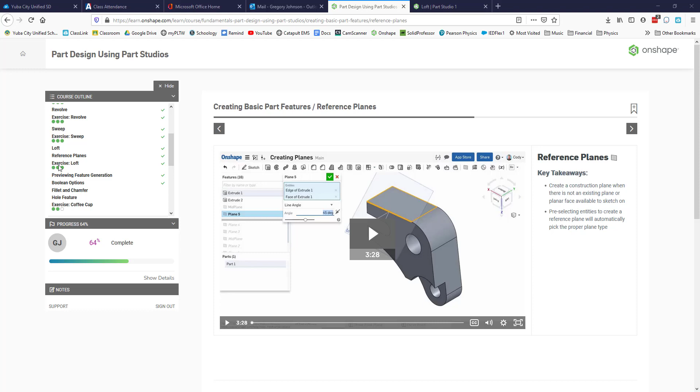All right, we are going to do the loft exercise now, and it is part of the Part Design Using Part Studios lesson, or course as they call it. It's very important that you watch the two videos that lead up to it, the loft and reference plane, so you know what's going on when they ask you to do those. Let's go ahead and get started.

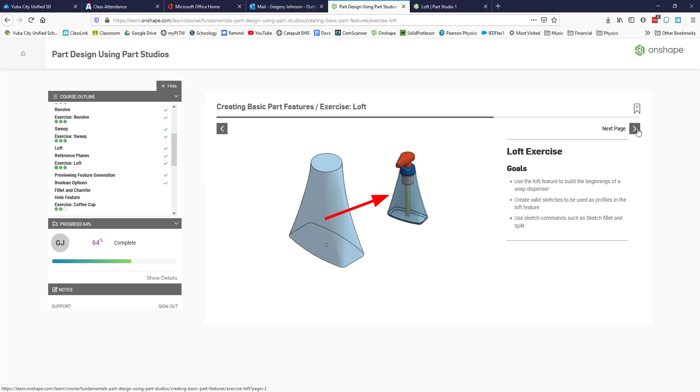I'm going to click over here on next page. It says create a new document. Be sure that the workspace length unit is set to millimeters. Begin a sketch on the top plane. This will be the bottom profile sketch.

I'm going to go over here, and I actually did already start a document called Loft. I got cut off, my internet cut off while I was making the video the first time, so whatever.

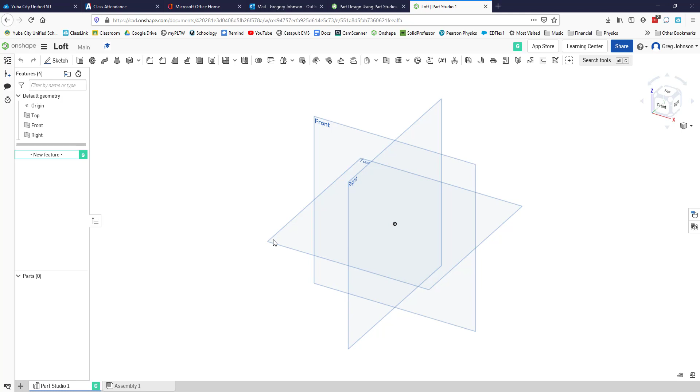So we're going to start a new sketch on the top plane by hovering over the top plane, right-clicking, selecting New Sketch. Now I'm going to go ahead and hide the planes by right-clicking on one of the planes and clicking on Hide All Planes. I'm going to hit the N key so I can have a normal view. And let's start our sketch.

Let's see what they want us to do here. Okay, it says sketch a rectangle whose center is coincident to the origin. Sketch two arcs as shown.

So I'm going to go over here now. One of the things that I'd noticed that people didn't realize from a couple of the earlier lessons is that there's another variant of the rectangle. This is the corner rectangle. This one's called the center point rectangle. So instead of specifying the two corners, you're selecting the middle of the rectangle and then you just draw it out. That's really good if you need your rectangle to be centered on something.

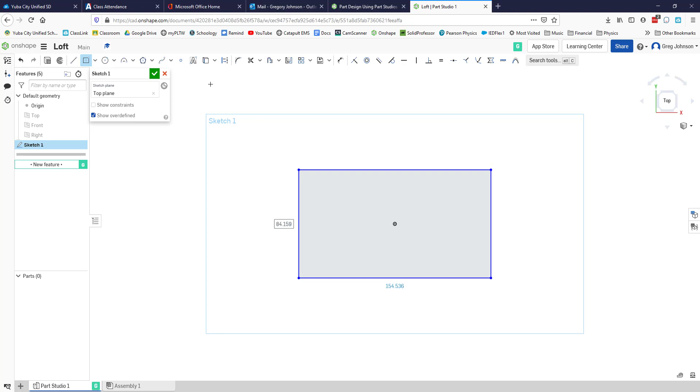So I'm going to go ahead and click, and I'm going to make a couple three-point arcs across the top and bottom. I'm going to click one corner, click the other corner, get it to about there, and then on the bottom I'm going to do the same. I'm going to click here, about there, seems good. And I'm going to hit escape to get out of that tool.

All right, the next step is to make the two horizontal lines of the rectangle construction lines. Add a sketch fillet of 8.5 millimeters to all four corners, and add an equal sketch constraint between the two arcs.

All right, so we're going back here, and I'm going to select both of these lines. You notice I don't have any tools selected, so I'm going to click on each line, and then I'm going to hit Q for construction.

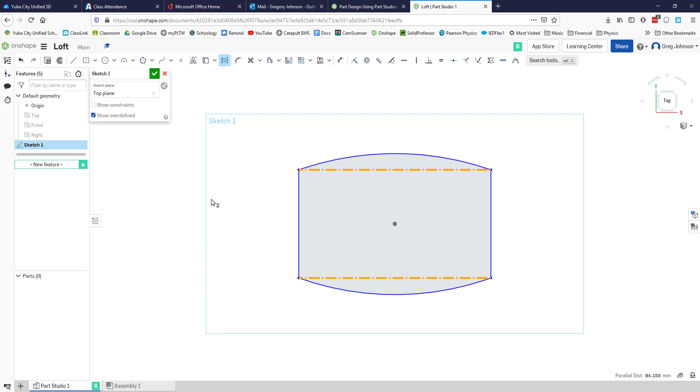All right, and then I'm going to add some corner fillets. So I'm going to hit escape and get out of the tool I'm in currently. And then you've got the sketch fillet. Now, this is different than the fillets that we do to the 3D geometry that already exists outside the sketch. Here, you click on your sketch fillet, click the corner that you want this fillet on, and then cannot add sketch fillet.

Oh, what happened to my construction lines? Well, I think when I unselected the tool, I actually switched it back, so that's my bad.

So I'm going to hit escape, and I'm going to select those two lines again, make them into construction lines once again. Now I'm going to get my sketch fillet tool, get out of construction mode, click on the corner, and then you notice that it shows the mouse with a green checkbox next to the left button. You just click it, and then you can enter in the value that you want. 8.5 was the value that I want. I'm going to do that on all four corners.

So I'm going to click, and it's already set at 8.5, so that's kind of convenient. Click, and then hit enter, and one last one, click, and hit enter.

Okay, now it wants me to do an equal constraint between the top and bottom arc, so I'm going to hit equal, click the top arc, click the bottom arc, and now we have equal constraints.

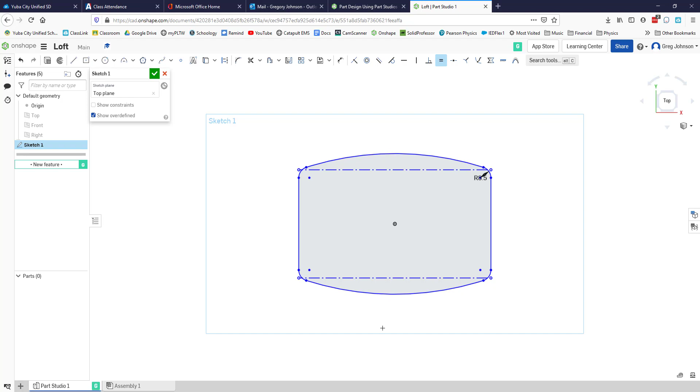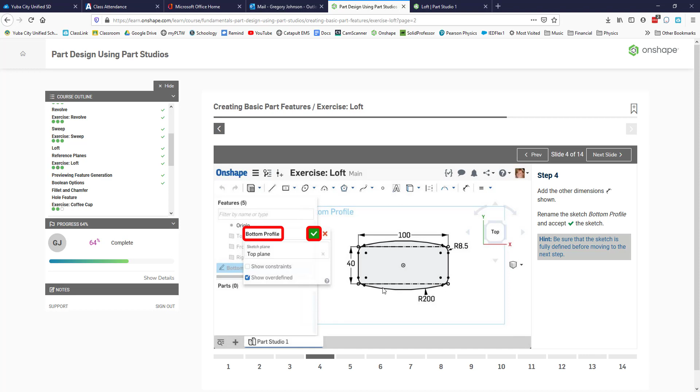Let's go back to the instructions and go to the next slide. They want us to dimension from the ends of the construction lines to be 100. The space between them will be 40. And the radius of the arcs will be 200. I'm going to move this up where I can still see it so I can refer back to it.

I'm going to get my dimension tool and start with the length of this line. I've noticed a lot of people would go and click this dot and then click this dot, but if there's a line that connects the two dots, you can just click on the line itself and save yourself a little hassle.

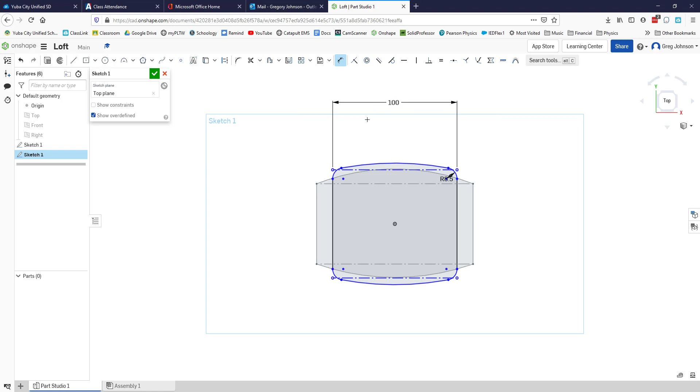I'm going to make that 100. Then I'm going to click both this line and this line and make that 40. Now I notice there is a sketch underneath my sketch.

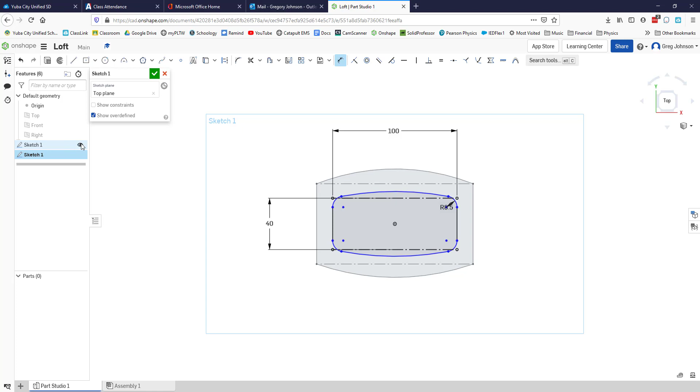I do not know what that's all about, guys. I think that has something to do with me losing my internet connection. So I'm going to go over here and make it hidden, and then I'll go back and delete that later. I did have this issue where the internet went out on me and it's acting funky.

All right, so the radius of my arcs is supposed to be 200. So I'm going to click on one of them and make it 200. And now we are fully constrained.

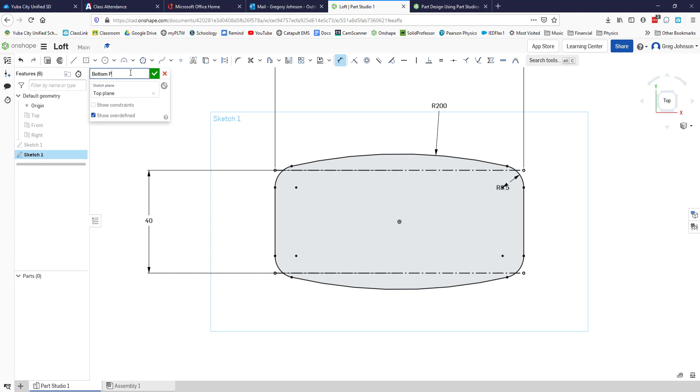All right, let's bring back our instructions. The instructions on the next slide tell us to accept our sketch and rename it bottom profile. So let's click the little pencil tool, call it bottom profile, and then hit the green checkbox.

Okay, and I'm going to go into an isometric view. There it is. Okay, so Part Design Using Part Studios. Let's see, what are we doing here next?

Now what we're going to do is create a new reference plane, and we're going to offset the new reference plane from the top plane with an offset distance of 50 millimeters, and rename the new reference plane middle profile plane.

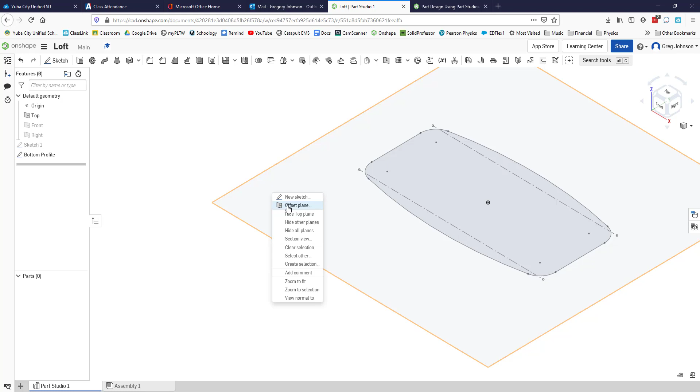Okay, so let's go back to our Part Studio. I'm going to unhide the top. I'm going to right click on it, and you can see the second choice is offset plane. I'm going to click that, change that to 50.

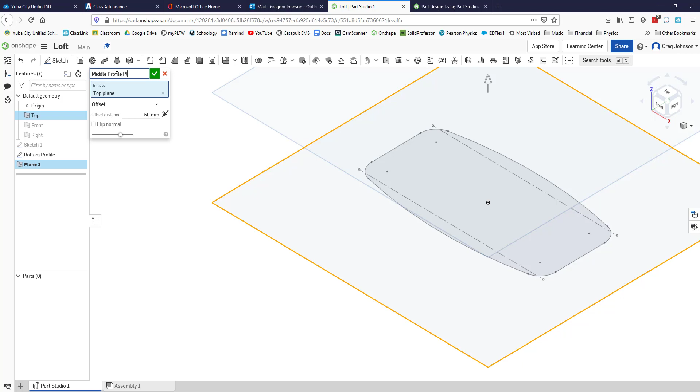I'm going to rename it, I forgot what I was supposed to name it, middle something, middle profile plane. I'm going to click here and call it the middle profile plane. Bingo. So we've created a new plane that's parallel to the top plane, and then is offset by exactly 50 millimeters. You'll see why this is important as we move on.

Okay, so now we're going to create a new sketch on the middle profile plane and sketch an ellipse. Be sure that the center of the ellipse is coincident to the origin and then the major axis is horizontal. This will be the loft's middle profile.

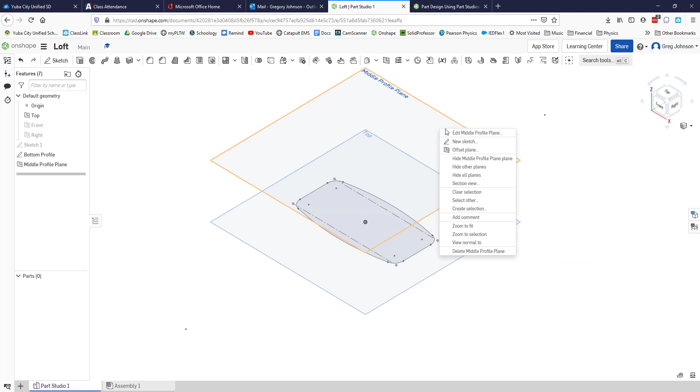Okay, so let's go back. I'm going to create a new sketch by right-clicking on our new offset plane. I'm going to hit N for normal view. And you can still see the other sketch down there, and that's fine, nothing wrong with that. We're going to create an ellipse, which you can actually find under the circle menu down at the bottom, so we'll click that.

We'll start it by being coincident with the origin, and we're going to bring that out a little bit and click.

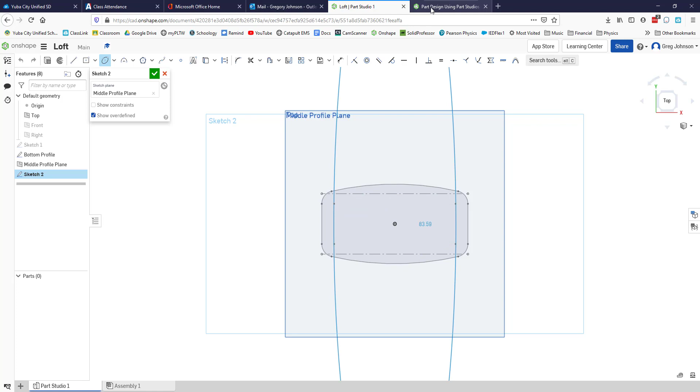Next, for an ellipse you have to click twice—one to set the width and one to set the height, but we're going to change those anyways. In the next slide, we'll dimension that: the height is 45, the width is 80.

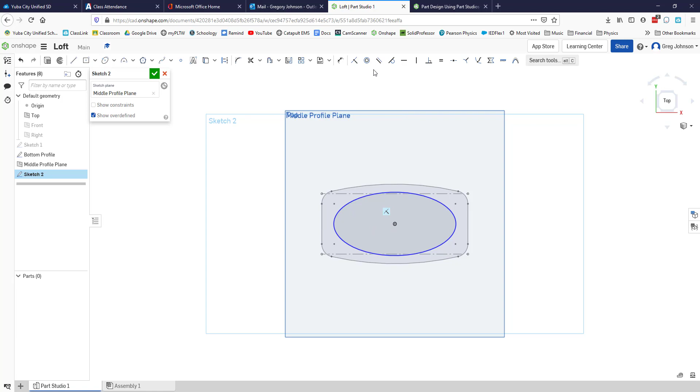We can do that by leaving the tool, hitting escape. If I click on dimensions and select this, I can do the width by coming up, and then the height by clicking and going out. Let me double check those: 45 and 80, yep. Okay, and it wants us to rename the sketch middle profile and accept the sketch.

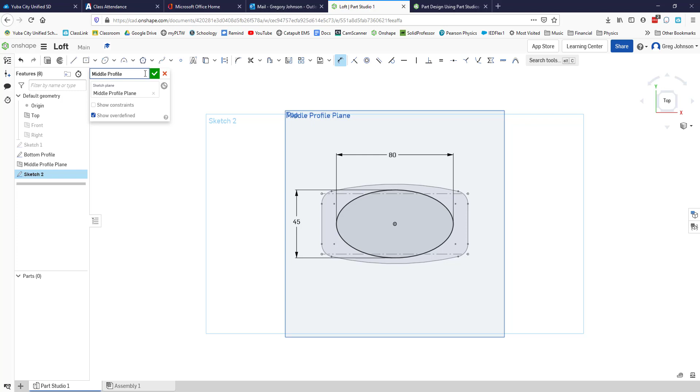So we're going to call this middle profile. It's a good idea to rename things so you can keep track—it gets really challenging when everything is just called sketch 1, sketch 2, sketch 3. It can be really confusing at times.

Okay, let's look at our isometric view now. Oh, and look at this—we've got a shape above our shape. All right, now we are going to create another plane that is offset from the top plane a distance of 125 millimeters.

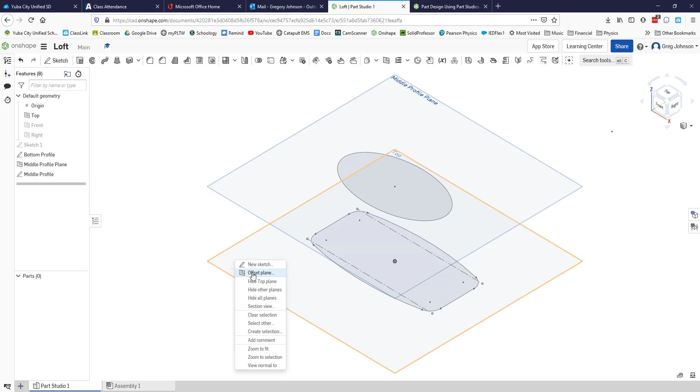I'm going to call it top profile plane. So I'll go back to my top plane, click offset plane again—this time it's 125. And we are going to rename this top profile plane. It definitely helps you stay organized when you have things like this.

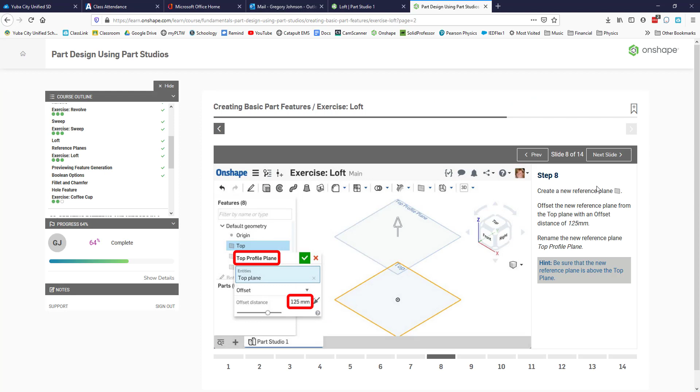Okay, so the next thing we're going to do, I imagine, is make a sketch on there, and we're going to sketch a circle. The center of the circle is going to be coincident with the origin.

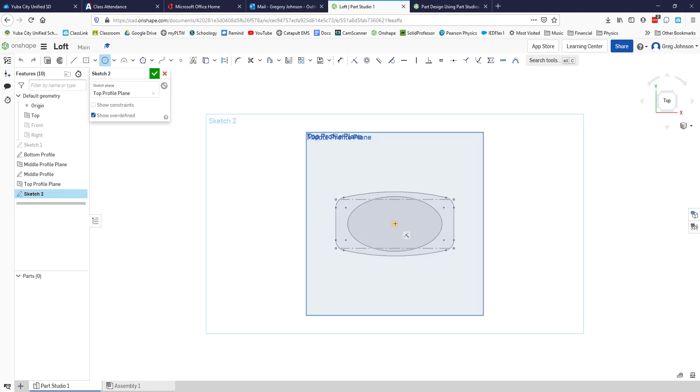Okay, great. So let's start a sketch by hovering over that plane and selecting New Sketch. I'm going to hit N to get a normal view, go back over here and select my center point circle, click on the origin, and make a little circle. I'm going to hit Escape to get out of that tool.

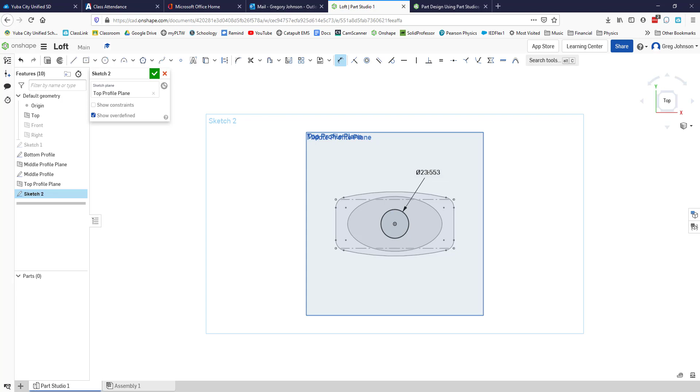And they want us to make it a diameter of 40, rename it Top Profile, and accept the sketch. Okay, so let's start off with the dimension of 40. And then we are going to rename it Top Profile and accept it. You can kind of see what we're building here—we're building the cross sections of our loft.

So now we are going to use the Loft command, and we're going to click on all three profiles from bottom to top—it's important what order you do this. This adds sketch region to the profile selection in the dialog box and creates the Loft feature.

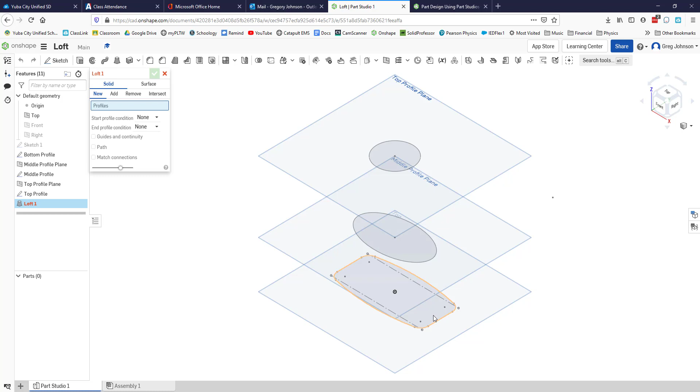Okay, so here's our Loft feature. Click on it, and we're going to select first this sketch, then this sketch, then this sketch. And it creates a nice smooth shape between them.

Okay, I'll just double check to make sure it doesn't say accept it yet. But yeah, it never told us to accept it, but I'm assuming we have to do that. And we're going to rename it Bottle. So we're going to click that, and we're going to call our part—rename it by right-clicking, rename, calling it Bottle.

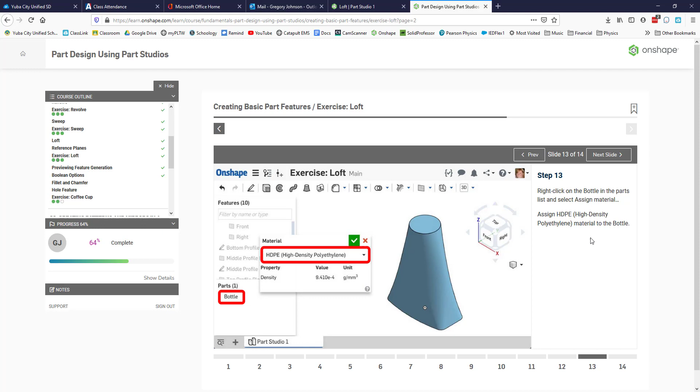Okay, right-click on the bottle part and assign material. We're going to assign the material HDPE, which is high-density polyethylene—it's a plastic. So let's right-click over here, assign material, and it is HDPE, and there it is, high-density polyethylene.

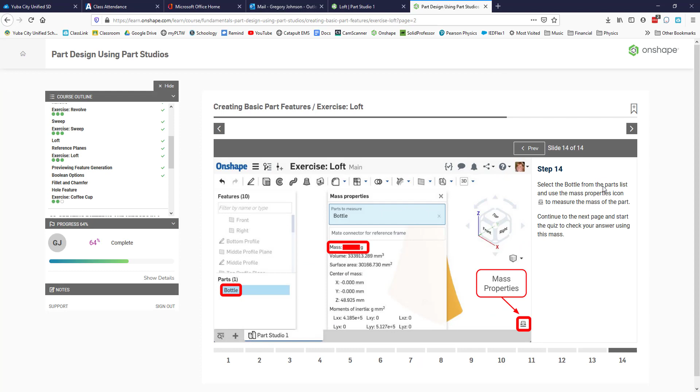Click the green checkbox to accept that. And let's see, now we're going to get the mass. We'll click the mass tool. Let's hide all the planes so it looks pretty. There we go, look at that thing. Click on the mass, click on the part—looks like it's 314 grams plus a bit extra.

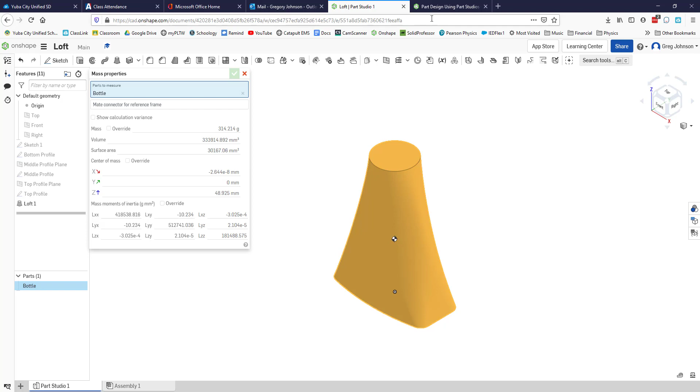So we will go to the next page. Begin the self-check: 314.214. See results—oh yes, it is good. All right, well, that is it, and good luck with that.